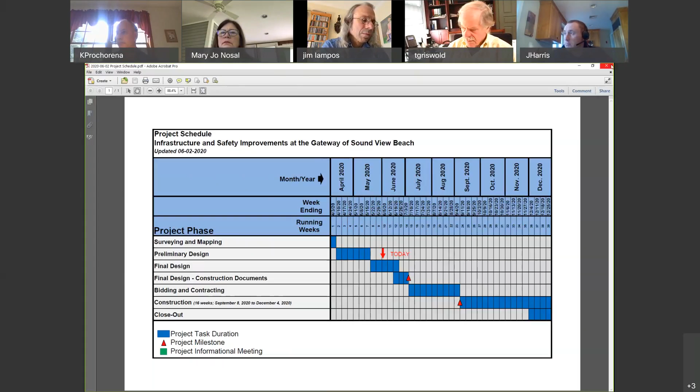So I will, let's see, stop sharing. Okay, so as we've done in the past, we'll divide the discussion up between Hartford Avenue and Shore Road.

We'll start with Hartford Avenue. Just to recap our discussion last time, pretty much the layout of the sidewalk on Hartford Avenue has been finalized as far as its location, width, etc. Really the items we were looking at were more the details relative to how the sidewalk interacts with the properties that abut the back of the right-of-way, in particular a grouping of properties as we approach Bocce Lane that are topographically lower. They're a localized low point that created some grading challenges, and that's what we'll focus on today.

At the last meeting, we had talked about putting some plans together to present to the building official and then ultimately engage the homeowner. So that's really what we're going to focus on today. We've got those done in draft format. I'm going to ask Jesse to chime in, but I'll start with the overview.

Please bear with us because we have a full plan set at this point. I don't think we will necessarily go through the entire plan set - that may get a little painful with the screen sharing. But we now have a complete plan set, which includes both the layouts we're going to focus on, but also all the details - for example, the detailed cross-section of how the sidewalk is built, exactly what the curb is. Unless the committee wants to see that, I don't think we need to go through it in this meeting, but those materials are ready to go.

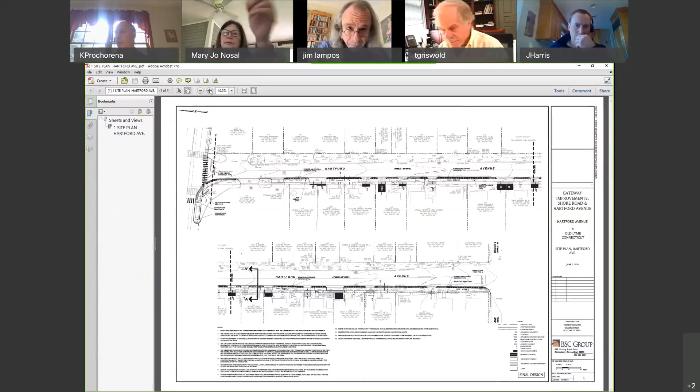So what I think I'll do is share the screen quickly and then turn it over to Jesse to get into some of the details. The first thing I'm going to share is the site plan for Hartford Avenue - this is something you've seen at the last meeting, but in this case it's a little more detailed. Can everybody see that? Yep. Sorry about the scaling, I will zoom in, and sorry about the slow refresh rate too.

Just a quick recap - so here we are starting at Shore Road. We have our gateway area, and last time we talked about how very little of the property of 277 Shore Road LLC that we're affecting, which was good news - most of it's in the DOT right of way and the town right of way. We had just talked about the small piece there. Working our way down, maintaining the driveways at his property.

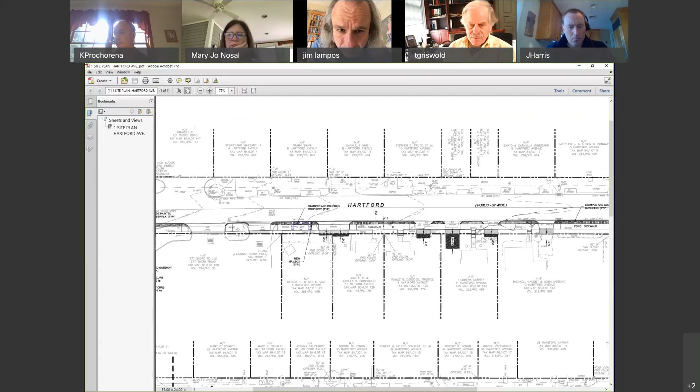You can see we've got the brick banding in, and we can talk about specifically what that looks like. Jesse's going to show you some images that are good design examples, and that's a classic example of a final design detail. You can see Jesse has started to include the new mailbox locations. I will be in Old Lyme today down on Hartford Avenue to verify a few things relative to mailbox locations, just to make sure we're getting that dialed in.

To recap from last time, we talked about the fact that we're going to go with basic black mailboxes on a steel post. Every property will have a 4-inch sleeve installed. Not every property will have a mailbox, but if there's a mailbox there, we will plan on replacing it - I'll say in kind, meaning relatively in its present location. That's one of the things I'm going to look at today.

We can use this as an opportunity to tweak the locations of some of those mailboxes if we need to. And that's important because once we put the sleeves in, they're in concrete. To put a new sleeve in would be a big deal.

If you recall, I think Jim asked a question about what's at the top of the sleeve. Essentially what we do is fill it with sand, and at the very top there's a thin cap of pourable grout material that can easily be removed if somebody later wants to put in a mailbox. So it's not like there's a PVC cap sticking above the sidewalk. Most of these things generally go unnoticed by the general public.

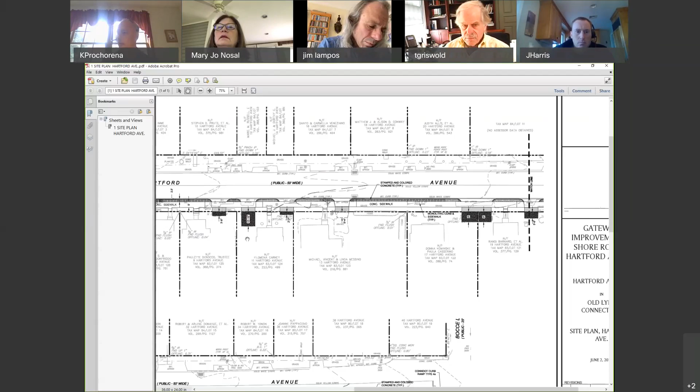You can also see, and I'll defer to Jesse for detail, where he's laid in the driveways on some of these low-lying properties we talked about last time. He'll get into more detail on what that means and some questions we have for the committee on that.

Approaching down at the bottom sheet, a little more towards Bocce, you can see more of these sidewalks as we approach, moving down towards Bocce.

Once we get back to 37, the topography is a little friendlier to us. We talked about that being the one area on the project where the private sidewalk comes into the right of way. You can see where we're cutting it off and creating a direct connection out to the sidewalk. I think that'll look nice. We will remove the fence that's in the right of way. I think we can do a nice job modifying what's there, and hopefully that will keep that property owner happy.

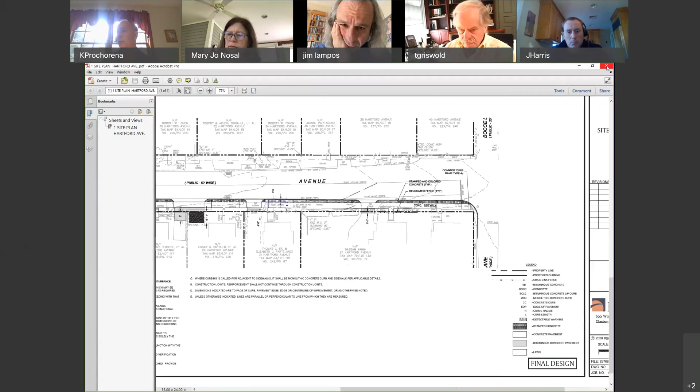That's an overview. What I'll do is defer to Jesse, he's got a couple of things to show you. Not only does he have the plan sheets, but we've got some of the graphics we talked about last time. I love the idea of the graphics, he did a phenomenal job on them, and a picture speaks a thousand words.

So I'm going to stop sharing my screen and turn it over to Jesse. Jesse, maybe we just start with some of the graphics to get the conversation flowing. What do you think?

He's on mute. Jesse, you're on mute. There you go. Thank you.

If you have questions as we go along, feel free to ask during the presentation since we're going to lose Jim. Please jump in. We want it to be really interactive at this point in the design, as we're starting to get into fine detail now. Make sure I share the right screen here.

All right, can everybody see? We're in front of 27 Hartford Avenue. We've superimposed the new walkway, 5 foot wide, and you can see the brick stamped concrete strip there.

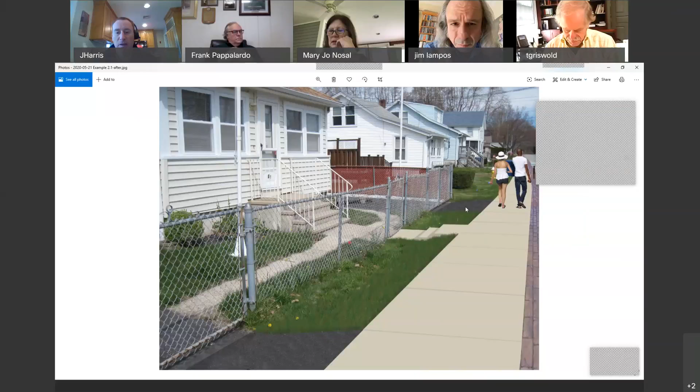This is certainly the easiest and cheapest option, and it's really kind of a discussion with the homeowner if that's something they want to do, or if they want something different.

We talked about the other option, which is again stairs to meet their walkway, and possibly some sort of retaining planter space, which would help limit the impact onto their property or other structures such as this fencing, or other types of fencing or plant material. So this is kind of what we came up with as a retaining wall type situation, with planting to fill that space.

Those planters would actually be on town right of way, so there could be some question as to who maintains them. I'd be more inclined to go with grass. It's cheaper, and also maintenance-wise, grass we can mow. If the homeowner doesn't mow it, we can easily mow it from the town's perspective.

I'd also like to add, as Jesse mentioned, the steps that we've included — it is my opinion that you're not obligated to put those in. Theoretically it's your right of way. If you felt it was simpler, both from a project cost standpoint and long term, there really is no hard and fast obligation for you to put those connections in.

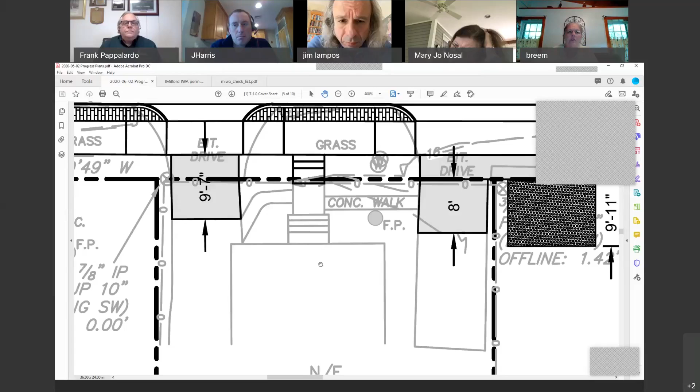In regards to those steps going down, is there any way to make them less drastic, such as stone, like larger stone across, 2 steps down on grass, or with landscape timbers on either side to make it almost like a plateau step down, looking more natural rather than that hard concrete. That may be an alternative to offer. And I don't think you would have the same hard surface that you could fall on or fall off of, because now you may be able to slope grass away from those steps.

I know in a lot of cases it would be slate. I don't want to get into buying any slate, but there must be other materials that can be used for a flat rock step down.

Yeah, I definitely think there's things that could be done, and Jesse, chime in please. We could actually make them out of concrete, but they could be colored concrete, for example, colored gray to simulate stone. They could have a stamped surface that is not a pattern stamp, but simply a textured type of stamp.

It's amazing what you can do with concrete, and it saves you money relative to bringing in granite slabs. It also gives you more flexibility to adapt to the site-specific situation, because you can set your form work, make minor adjustments to make sure everything lines up, verify code compliance as far as riser heights, then pour the concrete, versus buying slabs of stone that once delivered, that's it, you can't change them. But absolutely could use concrete to give them more of a natural look with a textured finish.

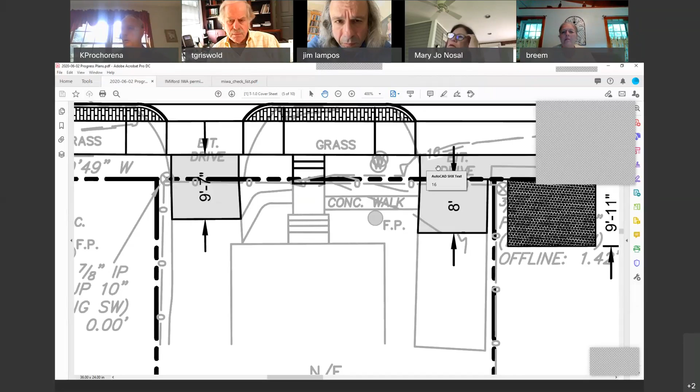Yeah, we can pull some images together. In fact, as Jesse's talking, I'll pull up some images, just to kind of get, again, I love pictures, right?

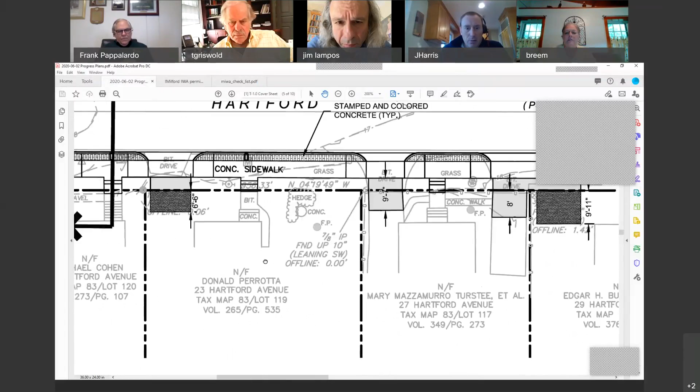How many properties are we talking about here? There's only maybe 3 properties that may have that particular feature. There's actually more than that. That's what I thought. 29, 27, 23, 21, like 19.

Because wherever they have an existing walkway that comes to the right of way and then ends, we're meeting it.

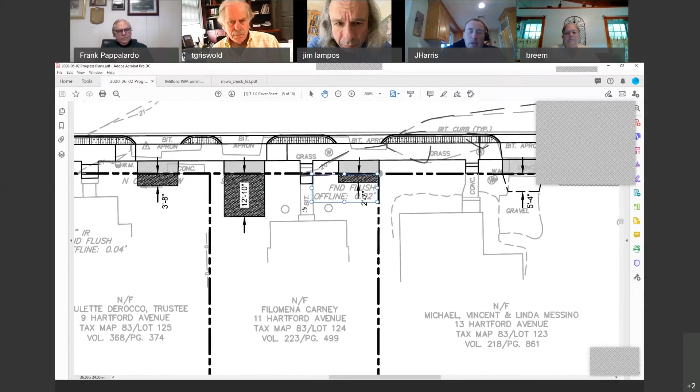In most cases, the stair tread is going to be consistent in riser height, respective of its own series of stairs, but it may vary across properties. One might be 6.5 inches, one might be 7, one might be 6 inches, depending on what difference we have to make up and how much of a slope we want from their walkway to the bottom of our step.

On 9, you can see there's one step to make up that difference, and then 7 doesn't have one. 5 doesn't even have a walkway.

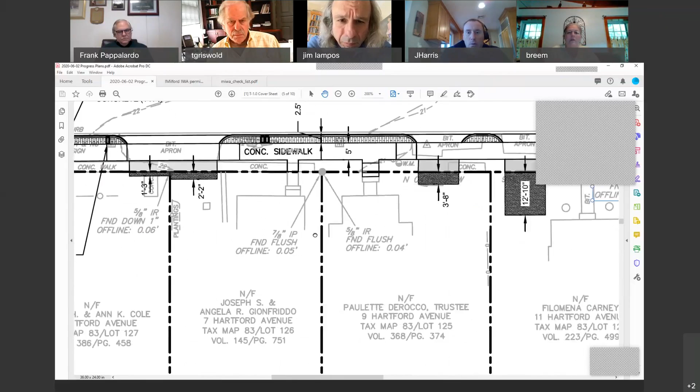I don't quite think we have to be consistent with each one, either concrete or steps, do we? We can take each property and see what works, because some properties, I believe, have a concrete walkway already.

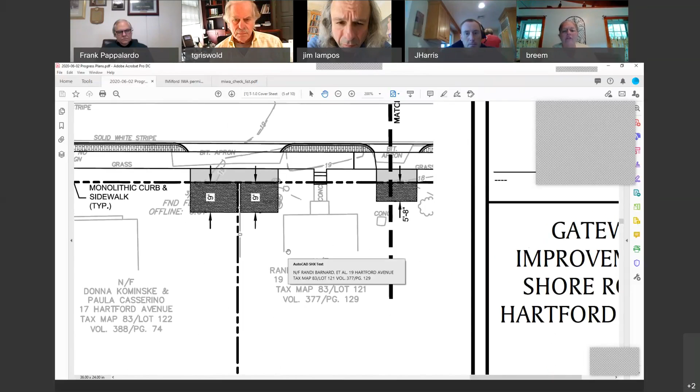Trying to put in a rock step is not going to satisfy them. I think you have to make their concrete look as good as possible, because we're taking some of their sidewalk. But others that just have a grass slope, I think the softer we can make it, the better.

There are others, a couple here at 31 and 29, that have a stone or paver walkway. Would we match a concrete walkway to their nicer decorative walk?

Well, I think that if we could, and it's not a massive difference in cost, then why wouldn't we? Right.

And I think what we talked about before too is, okay, now we're going to encroach on their property to meet their existing walk, like here in 29. Does that trigger us doing anything in particular to their existing walk?

Do you have a graphic of that property, of what you have at 29 filed? Yeah. No. What we have at 27 is kind of similar across the board, in terms of the step.

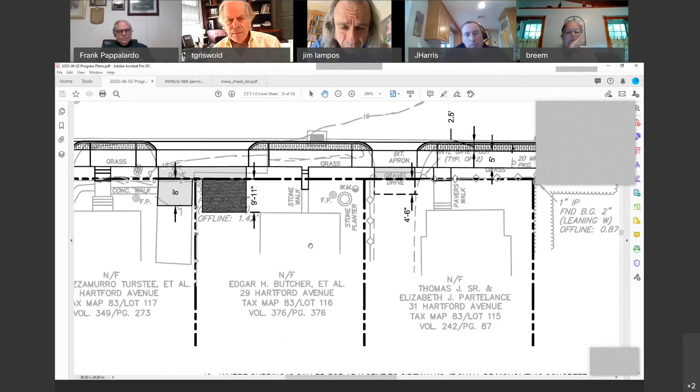You're saying their walk doesn't go out to the property line? Are you saying that the homeowner's walk does not go out to the property line, and therefore there'd be a gap between our walk and their walk?

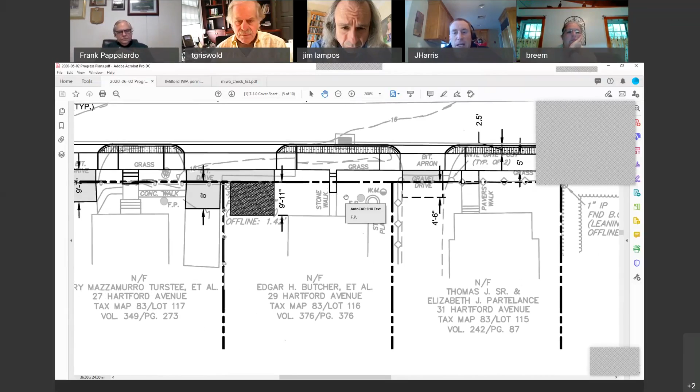That's correct. So like in 29, their walkway ends short of the right of way, so we're showing connecting it now. I guess that's a good question: do we just take our concrete walkway/step configuration and end it at the right of way, and it's up to the homeowner to meet it if they desire to connect their walkway to ours.

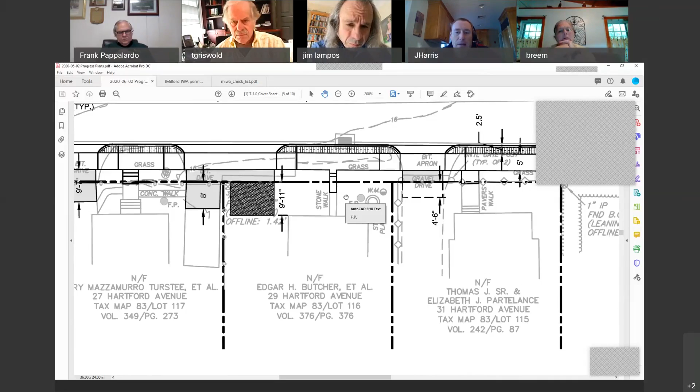And then that way we might get away from the areas where we're going to have to touch them, where at 31 it generally meets the right of way. But in the case of 29, we're not going onto their property to meet their walkway, since that may not be code compliant or anything we want to get into.

Well, I think it's kind of heavy-handed to say we're going to bring it up to the line, and it's up to you, homeowner, to make up that 2.5 foot distance.

I think if we can match up to their walkway, I don't think we're talking about a lot of properties here with that kind of matching issue. If we can match up to their walkway with size and style and aesthetics, I really think it would be a good thing on our part to do. I'm not sure how much it's going to cost, but we should look at the cost potential there.

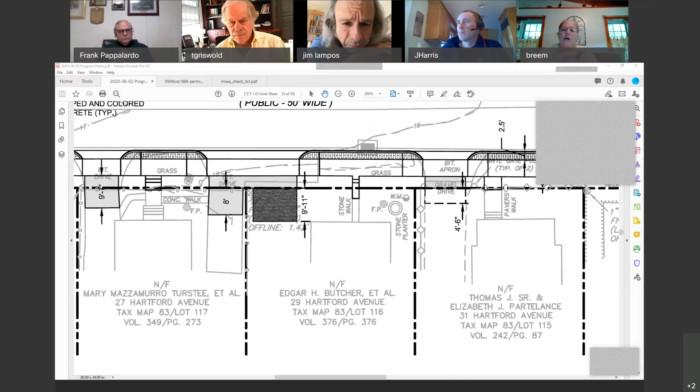Again, in a case like that, where they've chosen to have the walkway go out just a certain distance, if we have say 2 step-downs from the concrete that are more natural looking, a larger flat stone placed in, building up 2 steps out of earth and putting larger stones in it so that it's a soft step down, I don't think you have to meet their walkway, because all you're doing is 2 flat surfaces, not a poured step with a walkway away from it.

If we did the poured step, I agree with you. I don't think we should split hairs over 2 feet or 2.5 feet. I think that would just cause problems for us, and it would just look terrible.

That's why I'm hoping we can come up with something that's just a soft step down. I don't think we're talking any more than two steps down from any location, are we? No, that's a good point, Bonnie. I agree with that.

If we're doing poured concrete, we should match up. But if we could do something much softer to get to the property line and then let the homeowner decide how they want to make that transition themselves, I agree. I think that's a good point.

One thing you have to keep in mind, if you make the steps independent of each other, then settling and frost are going to start heaving. I've seen this in a number of situations where you have big flagstones or something, and over time they will not be uniform anymore, and then we'll have to go back and redo it. So the concrete, the unified step, if it were colored properly and so forth.

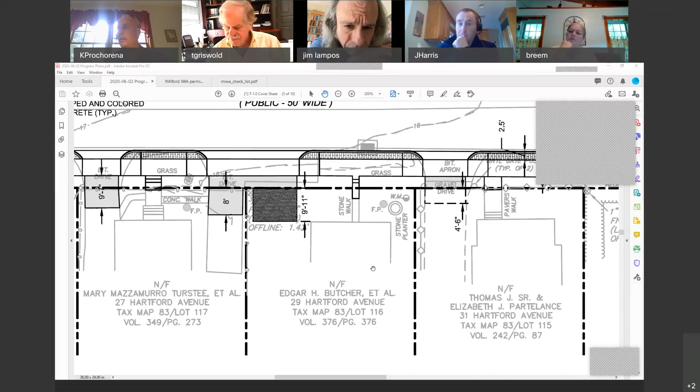Okay, so let's see. I've got Jesse - are there options for a natural looking step issue that would accommodate Tim's concerns?

Yeah, I'm almost thinking it could be, and depending on what Kurt's showing here, this happens to be precast concrete. You could just do a granite block. It's natural, relatively inexpensive because it's just a square block with a finished edge, kind of like this, to just be natural stone, and then we could set it on concrete, which would help with the settling issue long term.

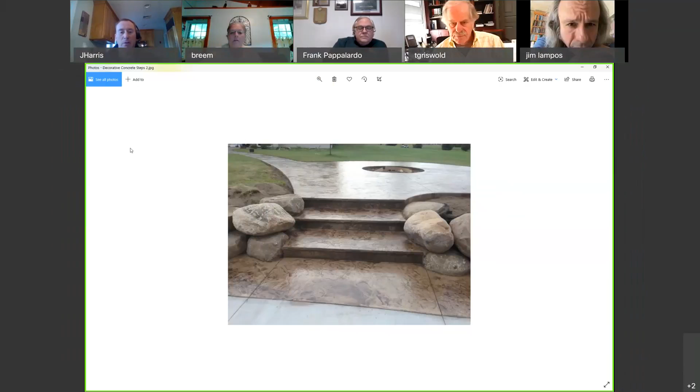And that way the town isn't responsible for putting in a stair that ten years from now starts settling and becomes a tripping hazard in itself. And then I found this one - not necessarily that we would use it, these are a little formal looking, but this is an example.

Of where you can stamp the concrete, as I mentioned, without a pattern. You're just stamping it to make it look like a piece of stone. What caught my eye on this one was the rounded cobbles, to your point Bonnie, of softening things with natural materials.

I just thought that was kind of an interesting approach there with some of the cobbles, right? It sort of does blend with the shoreline type environment. You could envision putting some decorative grasses amongst those cobbles or something, and very cheaply and easily spruce it up. So that's why I included that one.

Another example is that, and Jesse could probably give you a tremendous amount more detail than I can, but you can have many, many different colors, right? So you could have one property owner that says I love tan, another property owner says I love dark gray, and just by the dye that they use, make it look like a totally different stone.

Well, I think it's a nice idea to give some individuality to it, give the homeowner a little bit of option there, and I think that's a great idea, Kurt. I love the idea of those cobbles, and I also like the idea of the granite too. Maybe incorporating both of them - that's pretty interesting concept too.

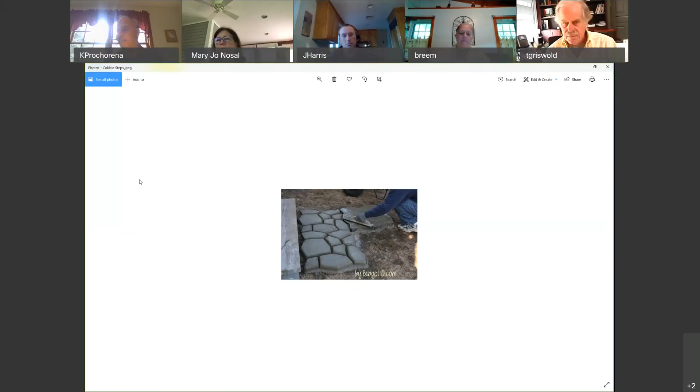Just style, yeah, that makes sense. Kurt, I'd recommend against those cobbles because you're going to get weeds growing out of those things, and it's going to be a nightmare to keep shaped up. Your first example of those nice cement blocks looked pretty good, it's easy to mow, and it's not just sheer concrete - it's got some character to it.

I think we got to keep it simple. So what we could do, kind of like what we talked about last time with the walls, is engage the homeowners and say we have, I'll throw out a number, 3 different options to choose from, and you can pick one of the 3, and that's what the project will put in. It's very compartmentalized - they may look different, but we know as the design team and committee that they're all generally similar. The same contractor builds them.

It's just slightly different details in the drawing set, and that way we channel the design selection the homeowner makes, and we can budget it accordingly. It's not an open-ended thing - it's durable, it looks good, and they feel like they've had a say in what they get. I think that's probably the easiest way to approach it.

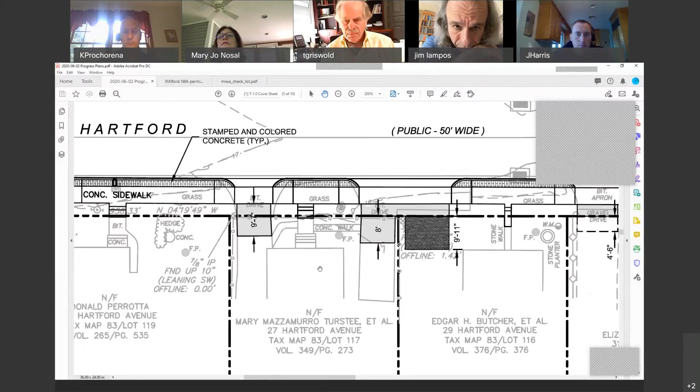Is Jesse on mute? Jesse, are you on mute? Yes, he is.

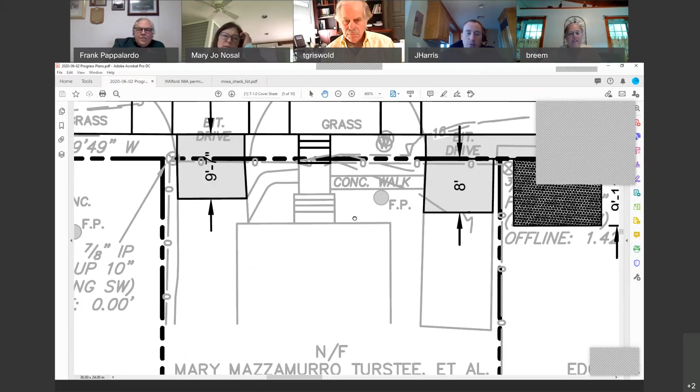Sorry about that. Yeah, I think we'll stay here at 27. This one offers probably the more challenging areas, given that they have gates that physically go across their driveways. Right now, the approach we've taken is that we have our elevation at the back of sidewalk, and in pretty much all cases we have a delta there that we have to make up from our proposed grade to existing.

The current town regulations call for no more than 5% slope within the right-of-way for driveways. So we've taken that from our back of sidewalk and extended that as far as we need to hit existing grades. In this case at number 27, they have two driveways, and the one on the right is 8 feet beyond the property line, and the other one is probably about 9 feet from the right-of-way into the property line.

The other thing that is challenging here, aside from the gates, is does the gate open in or out? Kurt can probably look at that when he's down there today.

They have a series of walkways on their property that come out to their driveway, and in particular, the one on the right is going to intersect our new driveway slope before we can get to the existing grade. So there's going to be a grade difference there.

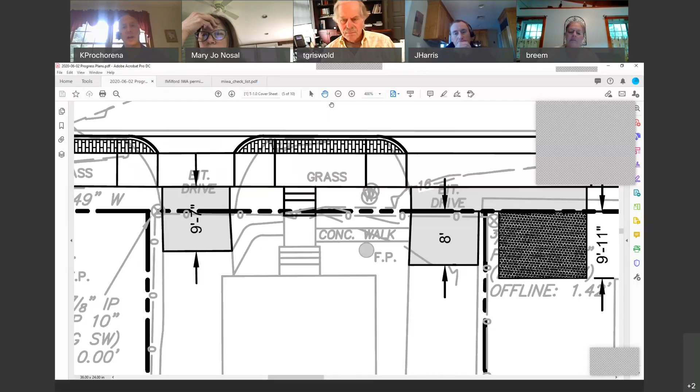Yeah, as we've been looking at it, we're thinking, where does this end? Every time we touch one thing, it affects another thing, which then affects another. It's like a Rubik's Cube.

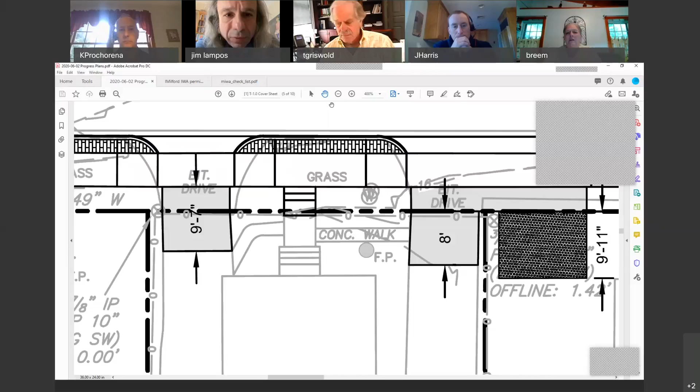There's a further issue with a high water table and seeing the way water generally pools around Soundview. If we're raising the driveway level on their property and raising part of the concrete walk to meet that driveway, now we're creating swales in front of the house where the water pools, even though we're taking a lot of the water and sloughing it off the sidewalk into the street. So we may be reducing the total amount of water that ends up on the property, but there may be parts where we're actually increasing the ponding due to the way we're creating swales. If we feather down the grass into their property, raise their driveway, raise the sidewalk, we're concentrating the area where this water is going to pool.

Between the two driveway slopes is what you're saying. Yeah, the concrete walk, where we're raising the elevation, even slightly, in their yard, and it doesn't take much around here to create this ponding effect.

Kurt, have we questioned these landowners whether they want to maintain the two ramps or whether they'd be willing to get rid of one? We have not engaged the homeowners yet, and that could certainly be something that after this meeting, we begin to engage the homeowners on, after we talk to the building official about things like the steps, that we absolutely ask them about the driveways. At the last meeting, I think we had speculated that historically, because a lot of these homes are either rentals or people have a high intensity of use during the summer season, people want to try to get as many vehicles onto these properties as possible. But I absolutely think it couldn't hurt to ask. All they have to say is no, but maybe we get lucky and somebody says, in fact, I'd like to get rid of that driveway.

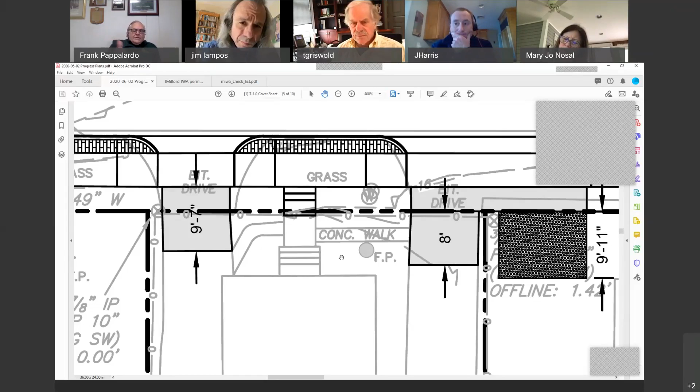That's doable. But the next problem is the swing of the gate. That's the issue I see here as being the big concern.

I'll look at that today, but maybe it's the kind of thing where we can always reverse that swing for him. I think Jesse's reading my mind, but yeah, fantastic, right? If it swings out, we change it to swing in.

Even if we had to readjust where the gate sits on the post, maybe it has to be a little bit higher, as Bonnie mentioned before. It's hopefully just a matter of undoing some bolts, lifting it up, and retightening the bolts.

I think one of the options you should give a homeowner such as this is the option to buy the entire walkway as redone. In other words, we're willing to do the area we need to do to connect, to make them able to reach the driveway so that it ties in.

But the sidewalk there looks in pretty poor shape. I think we should say, if you want the whole sidewalk done, here's the extra that it would cost you. You can opt for that as a buy-in extra.

Similar to what you did, Frank, at Soundview, Shoreline, with the association there. I think we did that with Vaquitos too, and a few others.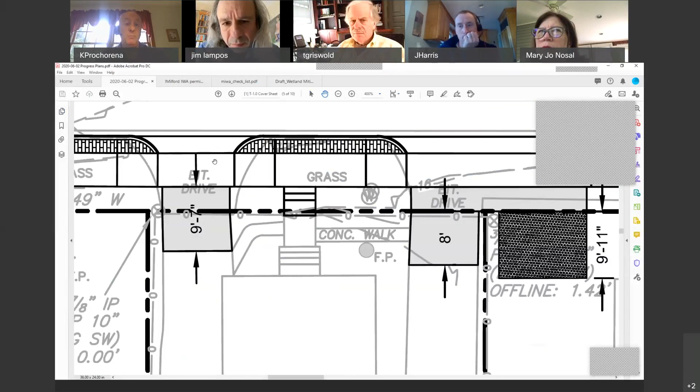The other thing to think about, kind of to Bonnie's point earlier, is those retaining walls in this case could be landscape timbers. They don't have to necessarily be stone or concrete - these are pretty small walls. So they could be the old fashioned 6x6 timbers with the big galvanized spikes that you see - pretty inexpensive.

I'm sure whoever gets this job will probably subcontract that kind of stuff. These guys show up, they cut the timbers on site, so they're custom fitting them right in, and then they basically fill it with soil.

I think it makes the steps make more sense as well. The steps started looking weird only when we took out that retaining wall, but we retained those concrete steps. This frames the stairs, so then we can have the inexpensive, easily maintained, stable and uniform option of the concrete stairs being framed by this retaining wall.

I love the idea of timbers. I mean, anything we do to soften this thing up—there's a lot of concrete here—I think makes it less sterile and less Disneyland-ish. Uniformity is great, but there's also got to be the opportunity for individuality.

And the timbers are good for 20 years, right? They're ground rated, pressure treated. And to me, a 20-year design span is appropriate. The other question I would have is if a homeowner asked, 'Hey, I'd love to put some plants in this thing, even though it's town property,' is that something?

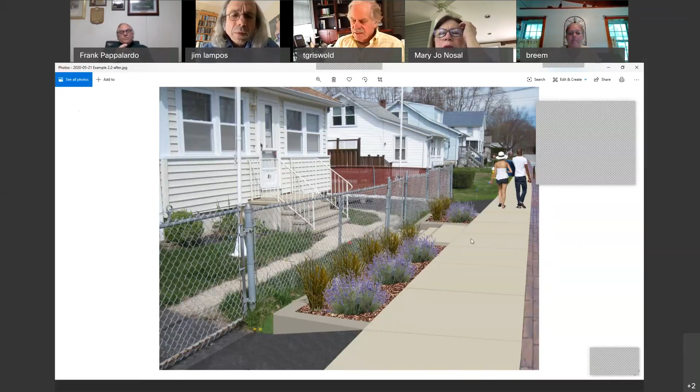Kurt, how much space is between the back of the planter and the fence for maintaining and cutting grass and stuff? Yeah, that's a great question - in this particular instance, because they have a fence there, it makes it a little bit difficult. My recommendation would be that the planter abut the fence, because there's no way you'll get in there to cut grass or anything. So in this case the planter would have to just literally abut the fence - not an ideal scenario. It's a little over 4 feet in this particular location.

I think this is the only one where there's a fence like this - all the other ones don't have the fence. There's a white picket fence down further a little bit, but yeah, this is the worst one for sure. The white picket fence, isn't that gonna get removed? That's already an encroachment, right?

Right, yeah. So I would recommend that the timbers essentially are touching the fence, right - that they're literally just right up against the fence.

Can we get a quote for cement or timber, and timber? Oh, absolutely, we can have this in the bid as a bid alternative, where the base bid is timber, for example, and then there's an alternate for concrete. In this case, Jesse, please chime in, but it probably would make sense to go with a segmented concrete block as opposed to a cast in place, because it's such a small wall. It's just logistically easier, and the segmented blocks are a little more forgiving because they can be field adjusted. There's no form work, it's hand work - you don't need to get in there and put in a footing or anything like that. Very good for what I'd consider a residential scale wall.

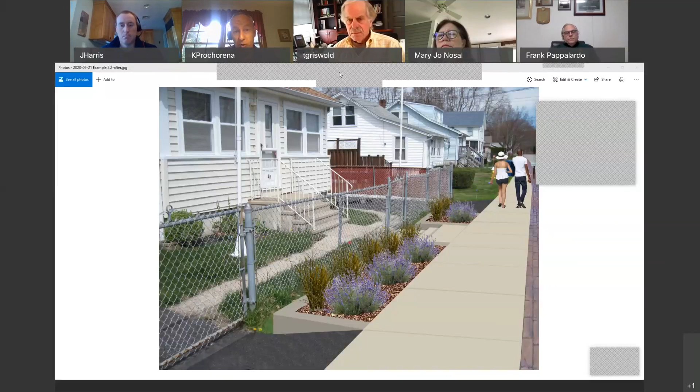Are those the interlocking blocks, the architectural interlocking blocks you're discussing? Yeah, exactly. Not to belittle it, but the kind you see at Home Depot - commercial grade, different systems. Some have a little notch they grab, some have a little fiberglass pin that holds them together, some of the newer systems actually glue together. And then there's a capstone that literally gets glued to the top to finish it off nice.

So then in this instance, Kurt, if the homeowner decides in year 2 to change the beds we gave them into something else, what happens in that response? It's our beds - the plantings, you mean? Yeah, say they decide they don't like them and want to put dirt in and set some shrubs instead. You know what you could do - here's just a thought...

Jesse could pick a couple of very simple plants that relative to the project aren't that expensive. Maybe we just say these are going to be some basic plants that are going in here. And then if a homeowner says, yeah, I'm fine with that, or I want to add flowers sometime later, maybe it's one of those wink-wink, sure, you can plant some flowers in here if you want.

We ask them to mow the grass now on town property, so there shouldn't be any problem with them putting some plants in. I'm not saying there's a problem because they're going to do it, and I think I would too. But if it's not maintained, or if the dirt runs onto the sidewalk, I think ultimately the town would be stuck with it. If a homeowner just completely abandoned it and it looked terrible, it's on town property, I think the town would have to go in and address it.

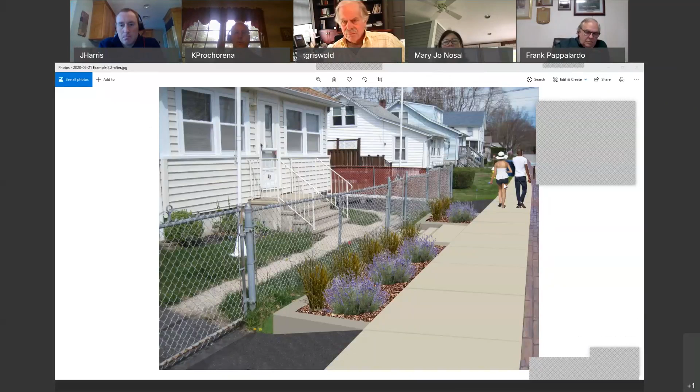So Jesse, do you feel that if we included as part of the base project just some very basic plantings, just to put something in there, that would not be a big cost item to the project in however many of these we could end up with? Yeah, it's pretty small because these would just be small perennials. It's not a big area to begin with.

It could be plantings or it could be grass. Somebody says, I don't want plantings, I just want to put grass there. Let them, we could put grass there, they can mow it. Yeah, because plantings you have to water like crazy for months, and if people neglect it, then it's our problem. So if somebody says I don't want to deal with the plantings, just make it grass, I'll mow it. Fine, great. Even that would look nice, it's green, it infiltrates the water, so it kind of still meets the criteria we've been talking about.

That would be fine too. I think in that regard Jim is correct that it will help with our water concerns, which really is a big deal for us here. So I think it's important, as we engage the homeowners, which will be the next thing we should talk about, that if a homeowner says no, I just want the grass slope, it's important that we make sure they understand, I don't want to come out and say it, but there is a possibility you could have water onto your property now that this slope is coming down towards it.